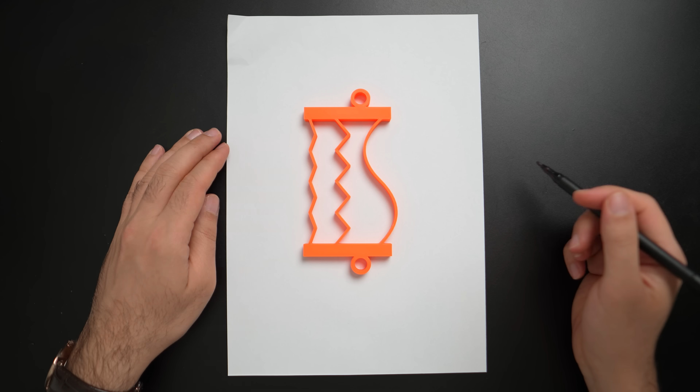Now, if I fix one end and apply about 100 newtons of force to the other end, about 10 kilos or 20 pounds, according to the simulation, the maximum stress point would be on connection B, about 65 megapascals. Here comes the question, ready?

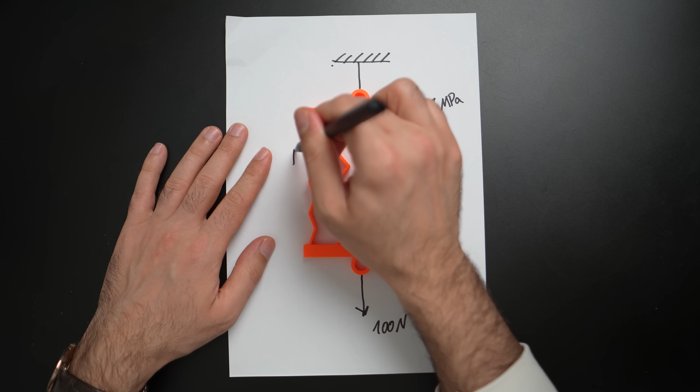Would this component break? And if so, where? Would it be on connection A, on connection B, or on connection C? I want you to pause the video and comment your answer below before I reveal the result.

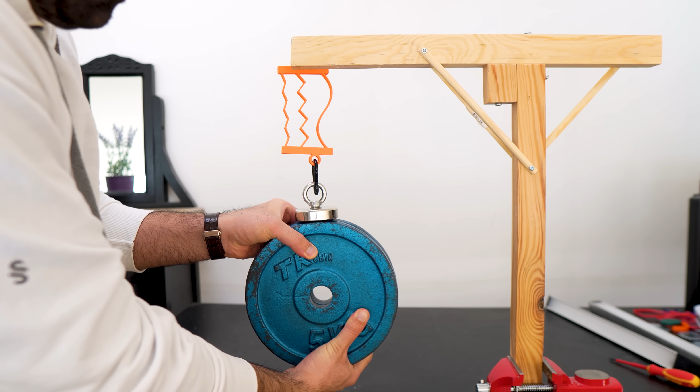To find the answer, we have to go to this test rig that I have built and put it to test. Here is our fixture. So I have 100 newtons here. I'm gonna connect it to this magnet, and as soon as I let go of my hand, we'll find the answer to this. Ready? 3, 2, 1.

It didn't break. Even at 100 newtons. Even if I apply more force to it, you see the test rig is bending down, but the component is not breaking. So, what's happening?

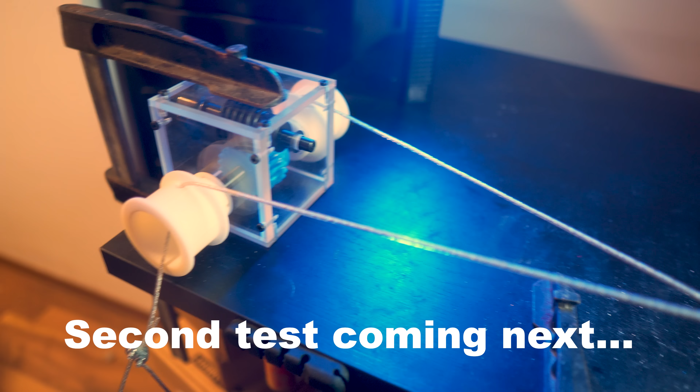So what happened here? What good is FEA then? In a few seconds, I'll increase the force until one of these connections actually break. Then we'll see whether your second answer was right or not.

But before I do that, I want to tell you the 5 ideas that govern FEA. These ideas apply whether you're analyzing a bracket, a medical implant, or a plastic housing. If you understand these 5 ideas, most FEA problems stop feeling so mysterious.

Idea number 1: FEA does not give answers, it gives direction. Most engineers run FEA to find the answer to the question, will it break? That question already puts them on the wrong path, as you have seen. FEA is not a judge. It does not decide pass or fail. FEA is a directional tool. It shows where stress concentrates, how load flows, and how sensitive geometry is to change.

Engineers who understand this use FEA early to shape designs. Engineers who do not use it late to justify them. The difference alone separates good simulations from bad ones.

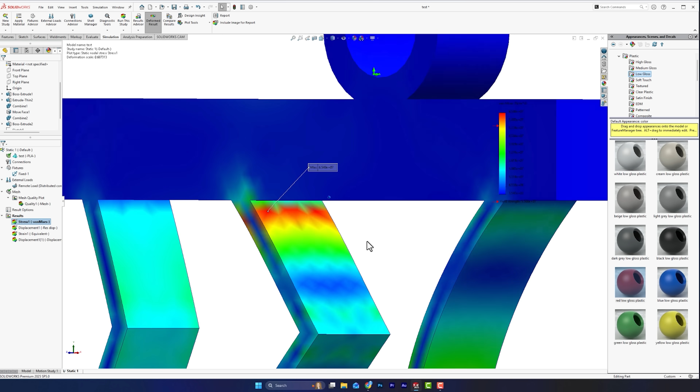Idea 2, hotspots are about sensitivity, not failure. As we have seen, a colored plot shows concentration, not catastrophe. A red region tells us this area is sensitive to geometry, loading, or constraints. It does not tell us this is where the part will fail or when it will fail. I think we have established that.

Across structures, fatigue problems, and thermal systems, the governing failure mode is rarely the highest peak value. It is the most sensitive region over time. Once we start to see hotspots this way, we stop chasing colors and start making good decisions.

The third idea is material. Material behavior closes the simulation. FEA never stands alone. Every simulation is a balance equation closed by assumptions. A stainless steel part and a super elastic nitinol part can show the same plot and mean completely different things. Stress governs one, strain governs the other. Two engineers can look at the same result and reach opposite conclusions. Not because one is wrong, but because one understands material behavior and the other one probably does not.

Idea number 4, boundary conditions decide whether results matter. FEA is brutally honest about one thing. It gives you exactly what you ask for. Garbage in, garbage out. If your constraints, contacts, or loads do not reflect reality, the results can be perfectly converged and completely meaningless. This is why most bad simulations look clean. Understanding how a part is constrained in real life matters more than the mesh refinement, for example.

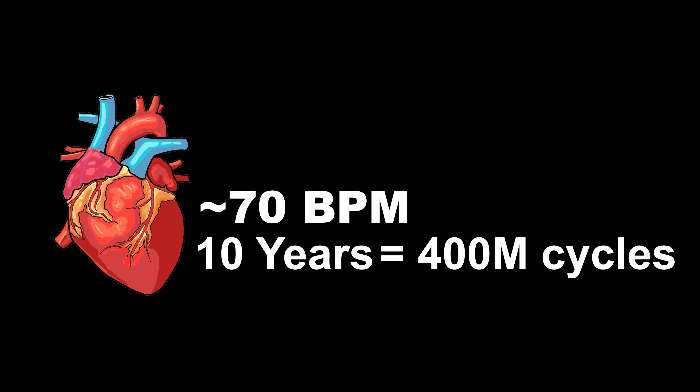Now, you cannot afford to wait 10 years to find out your design is going to pass or fail. So FEA comes in and you run the simulation. You apply the realistic boundary conditions that you think your component has to go through, not only after the implantation, but also during manufacturing, because that material has undergone a lot of stress during manufacturing. In the early stages of manufacturing, it's heat treatment, it's pulling, it's pushing, it's polishing, all of that is taken into account. And then once you do that, you put the final product for a fatigue test in FEA.

That speeds up your process and you don't have to wait 10 years. And even after that, if it fails, well obviously you go back to the design board and you're gonna have to adjust. But even if it passes, you don't celebrate much. It's good news for sure, but it's not a green light to just go to the market. It just gives you the approval to start the in vitro, that is putting the component in a lab machine.

And do the actual testing on the real product, only to find out if your FEA analysis was right. So in other words, if it's done right, it saves you time. And if it's done wrong, it can cost you a catastrophe. This is true in aerospace, automotive, medical, as I said, or even consumer products. FEA does not replace testing. It makes testing smarter.

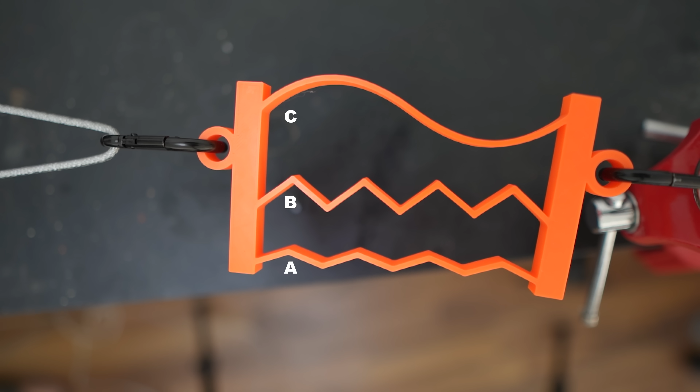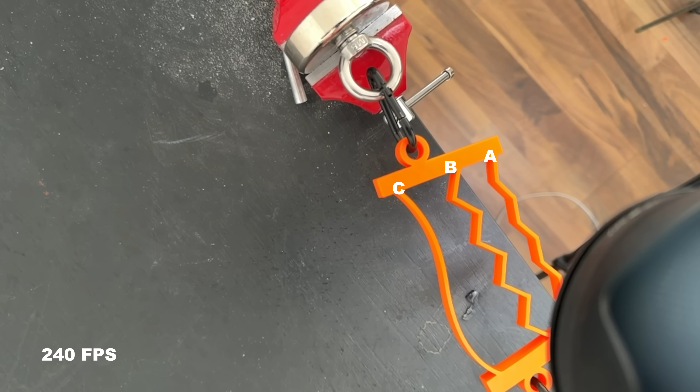I have put a gearbox with a worm gear on the left side, pulling this wire gradually to the left, and this component is fixed on this right side. I'm gonna speed up the video right until the moment it's gonna snap. Then we slow down. Here it's about to snap. It happens so fast that I have to include another shot taken with my phone with 240 frames. Unfortunately, it's not enough to see which one snaps first, but I leave the decision to you.

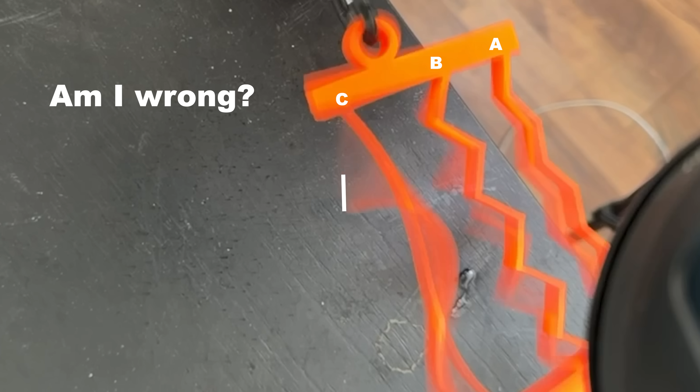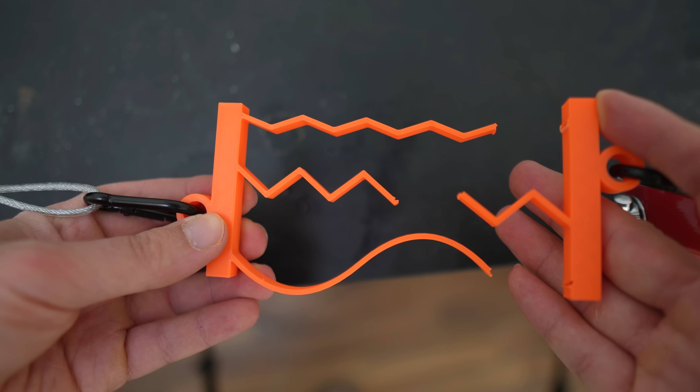One thing very interesting, at this frame, we see connection B and connection C are broken. I have to assume connection C broke first because the displacement on connection C is larger than the displacement on connection B. So if you have picked C, you answered correctly. However, take a look at this frame on connection B. It did not break from the hotspot that we saw in our analysis. The analysis picked this spot, but it broke a little bit further down.